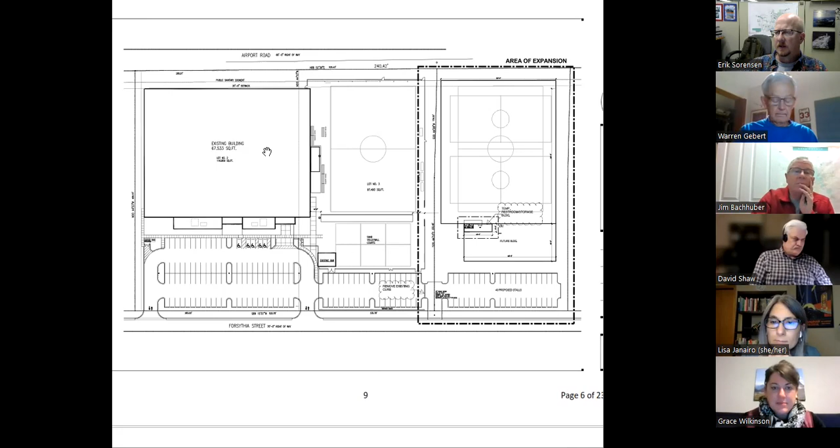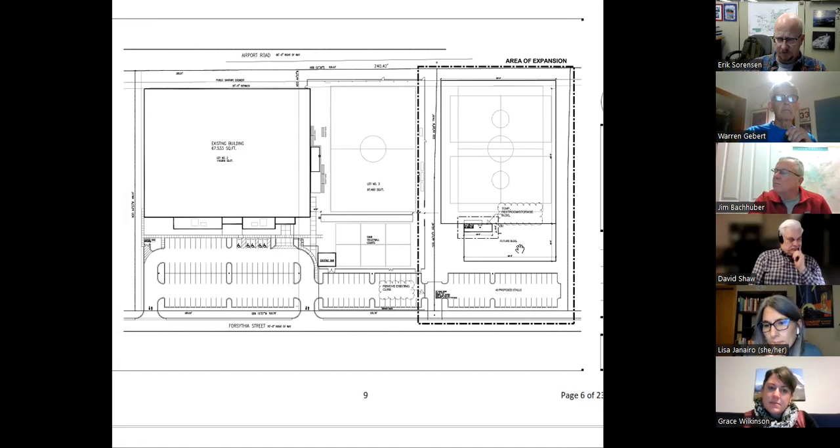So this is the existing KEVA site, Airport Road, just east of Pleasant View. Big building, one outside soccer field. And the proposal is for the lot next door. They're going to put in a couple more athletic fields, kind of a temporary bathroom building, which the plan is will be swallowed up by a larger building, and some additional parking.

He's got 2 biofilters planned at each end of the parking lot here. And they're going to fill this site up a little bit too, trying to match grade with the existing athletic field up here. So north is to the right on this screen. And they've asked for fees in lieu due to poor soil conditions.

There are 2 calculations that were included with the packet. One is for infiltration, the other is for recharge, and we treat those as whichever is worse of the 2. So the poorer performance is with the recharge, and he came up with $8,000 and some for that.

This plan is still in flux, but I thought it would be wise to bring it to you guys now, with potentially no meeting in December, just to try to keep it moving along. So I can answer questions. My recommendation was to go ahead and approve it.

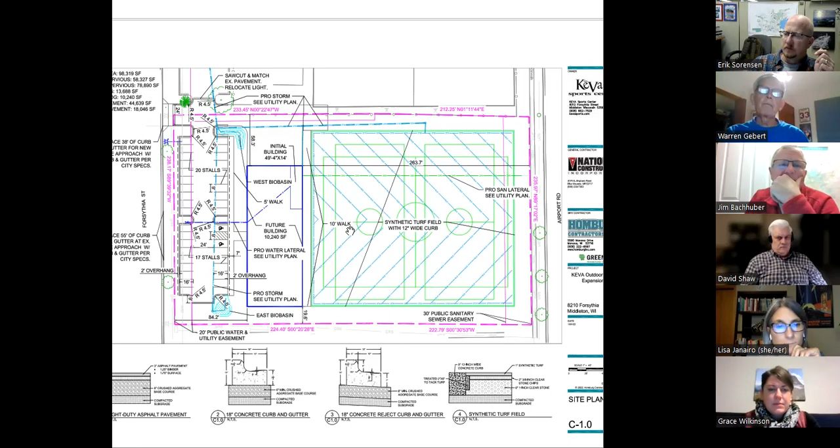They wouldn't meet the requirements for infiltration. They don't meet either of them. His infiltration calculation shows he's making about 71% of the requirement. And his recharge calculation shows he's only making about 34% of the requirement. And for those of you who are unfamiliar, in this sense the word infiltration really means stay on, which includes evapotranspiration, and recharge is what's actually percolating down into the ground.

So if we approve this, then they still would put those facilities in, right? They just couldn't meet our requirement. Yeah, and Confluence Pond provides the peak rate control for this area. So what they're tasked with is just infiltration and pollutant control, TSS control. So he's meeting that by passing the bulk of the water through 2 biofilters.

This is not a very intensely impervious development either. This is a synthetic turf field with tile under drains. So there is some discussion about how these facilities are treated, and we've been talking about that with the county. But it's not really impervious necessarily. So he does have future building included in his calcs, and this parking lot, and the athletic field. And he's meeting the TSS requirement, but not infiltration or recharge.

And the problem with the site is it's high groundwater mainly? Yeah. Which is not surprising in this area. Right.

Yeah, I sent out a couple emails today, and it probably isn't relevant to this case, but we have to start thinking about high water tables. And I think we need to have a specific ordinance that deals with evapotranspiration. This is obviously something for the future. I wouldn't use it, I don't think it necessarily has anything to do with deciding here, but...

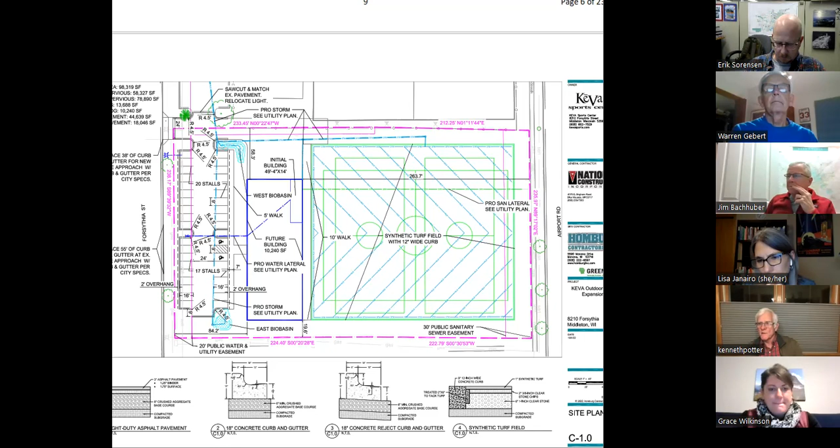It did ring a bell for me that high groundwater is increasing all over the county. We're not as aware of it because a lot of it is in parts of the county that don't have a whole lot of development, but if we could put that on the table for a future discussion, or whether we want to have a specific meeting on that, I think we need to come up with some kind of modification that deals with evapotranspiration.

I like that idea, Ken. I started looking at our ordinance and making some recommendations for volume control, which is evapotranspiration. And I got some rough wording down, and if I get some more along, I'll pass it on to you and let you look at it.

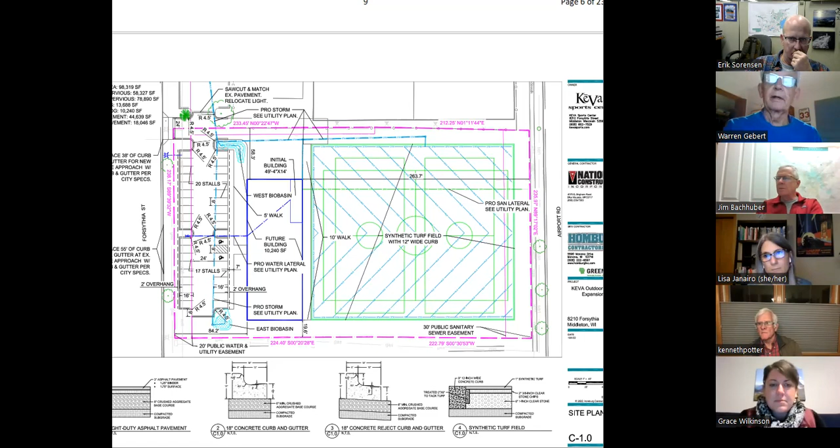Okay, that would be revising our present ordinance. You're talking about a separate ordinance? I don't know how we want to do it, but I think we have to worry about rising groundwater before we start having some big issues. Back when we put all this in years ago, we never even considered the possibility that groundwater could rise to the surface in some places. And now we know it can. So I think we're going to have to emphasize ET more.

Just for the ET volume here - this whole field is going to be turf, right? So it's too bad it's not grass. You're not going to get any ET off that surface. No, you get some evaporation. Yeah, a little bit.

Ken, are there any tools or models that have been developed for this? No, I don't think there are. That's something we're going to have to come up with, some way to quantify this. But I think we've got to do this sooner than later.

There's all around the state problems now with high groundwater. It's one of those things that's so different than flooding on Lake Mendota, which changes every year, but once groundwater gets high, it's really hard to do anything about it.

I have a question for Erik. So Erik, the $8,500, that's a one-time payment? Yep. And what do we do with that? How does that help us?

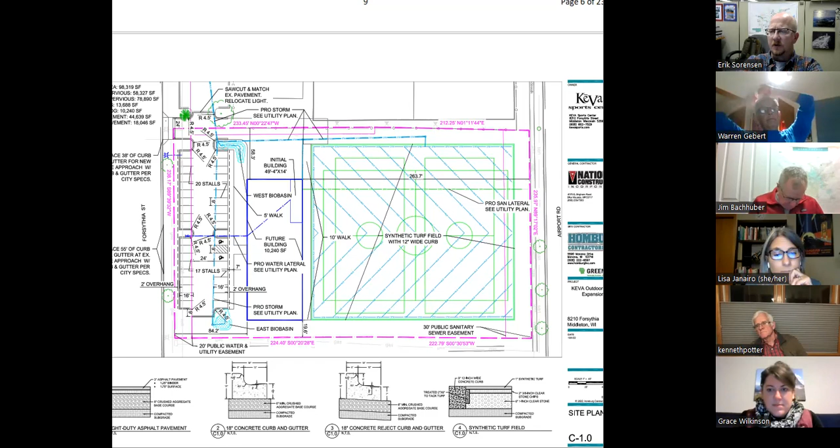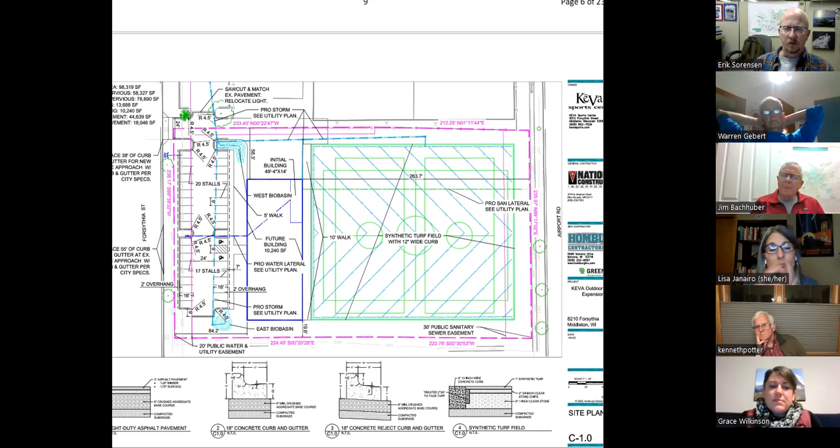Yeah, you're right. But I think Eric Thompson did a pretty complicated analysis for you guys a few years ago, trying to involve getting prices from developers of what did this facility cost, and how much. So the intent was that the fees in lieu would balance those costs, and I think it's relatively close to that - they're paying a fee in lieu roughly equivalent to the construction costs for the facility they would need if they could build it.

Just to follow up on Lisa's question - tell me if I'm right or wrong here, if anybody remembers - I think that money was used, some of it, back we're talking 15 years ago now, for some infiltration practices like at the high school tennis court. I think that might have been constructed with some of that fund. So the idea was to find infiltration somewhere else to offset this, but as Ken says, now we're fighting the high groundwater issue. It's just a good idea still.

Are they going to purchase this land to the east? Is that where the new field's going, or do they already own it? I think they already own it. It's an empty lot right now. There was a farmstead there, and the foundation elements of the old farmstead are still sitting there.

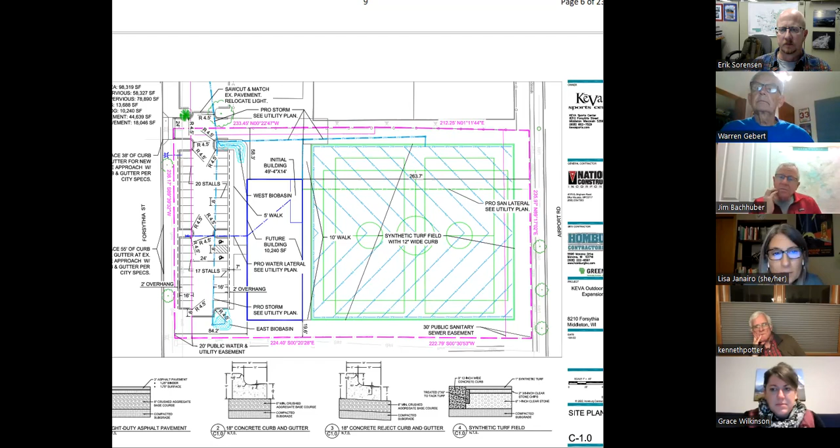Well, if there's no further discussion, we need a motion for approval. Well, I did have a couple of questions on page 13, Eric, if you could go to that page.

Number 5 on this page mentions the Village of Cottage Grove ordinances. I believe that should be City of Middleton. Good catch. Also, that website isn't a link, and I think I copied it correctly, but it doesn't turn anything up. I need to fix that.

There's a mention of inspections. Number 3: all erosion control measures and structures serving the site must be inspected at least weekly, or within 24 hours of the time 0.5 inches of rain is produced.

Who's responsible for that, and how can the city verify that it's happening? That is a standard requirement of a DNR construction site disturbance permit. The contractor is usually responsible for that.

This is something we also pay Dane County staff to do for the City of Middleton. Casey Coconati comes up at least once a week and does construction site inspections for us. She's really doing a quality assurance check.

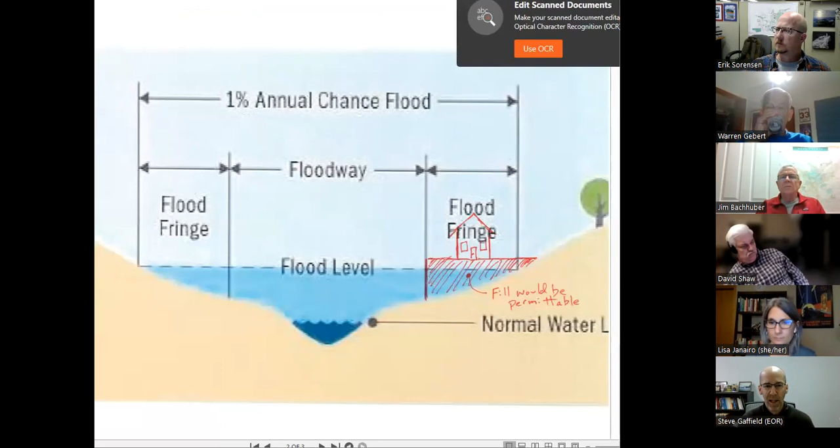Traditionally, most floodplain maps are delineated with what's called a steady flow model. There's a first step of engineering analysis to look at rainfall, say 100-year rainfall, for a watershed like Pheasant Branch Creek, to find the maximum rate water discharges into the creek at different places. That peak flow is put into a hydraulic model of the stream channel, bridges, and floodplain, and run down the stream as a steady flow, that maximum flow running all the time, to see where the water level pops up. That works just fine and is the state of the art, or state of practice, in many places.

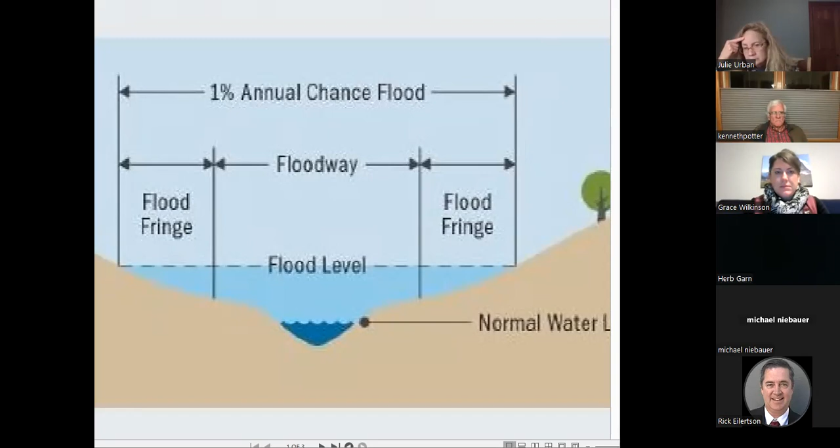But there are other places, and Pheasant Branch is a good example, where there are ponds and other areas where a lot of water gets stored. Much like an engineered detention basin, it slows the water down, detains some of it, and you have less flow downstream of that storage area or pond. To simulate that, you need what's called an unsteady flow model, which looks at change in flow over time, tracking how much runoff comes into these storage areas, how they fill up through a storm event, and what the release rate downstream is.

So floodplain maps can be drawn either way, and there are some policy implications depending on which choice the municipality makes to construct maps. There are some different requirements. Let me pause here and see if anybody has questions, or Eric, if you have any comments.

Quick question: when the ponds are being modeled in the unsteady flow approach, how is the lifespan of that storage considered, since it's filling with sediment over time?

Right, so the model represents the world and those ponds at one point in time. You can change that, you could say, what if this fills with sediment, we don't have as much storage volume. That can be changed in the computer model, but the model represents maybe a one day or two day storm event. It's not simulating what happens over, say, 20 years.

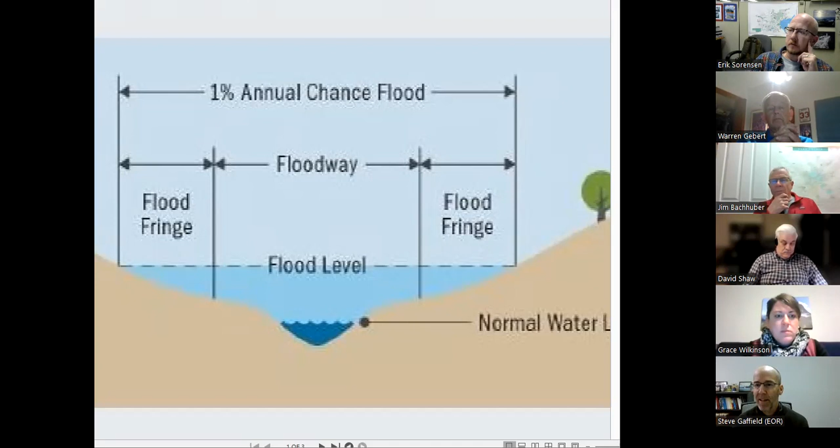That's right. Eric, this might be a good segue to go to the first slide because it's got a little bit of regulatory information on it. So yeah, Jim, to answer your question, it's a municipality's choice.

You could model steady or unsteady. You could model every storage area in the watershed or only the ones you think are important. DNR says however you want to do it is fine, as long as the computer models match the maps. There are trade-offs we'll talk about, but as long as you have a consistent approach, it's allowable to treat it differently.

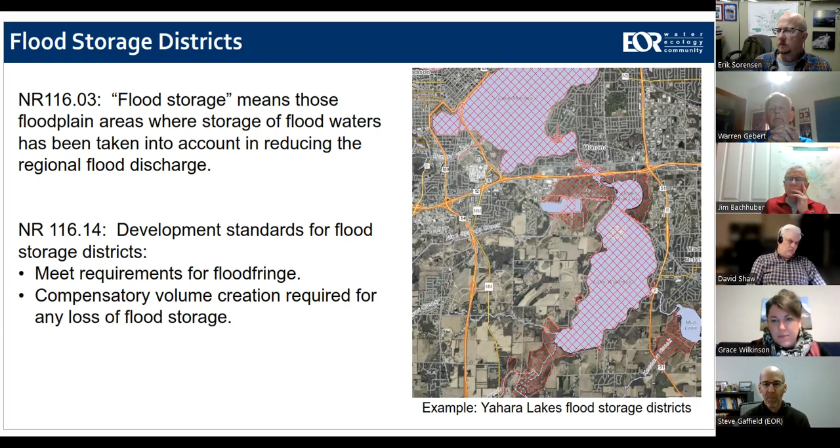So flood storage districts are defined in Wisconsin Administrative Code. They don't show up on FEMA flood insurance rate maps, but they are a zoning overlay that the state of Wisconsin requires in some situations. NR 116, the floodplain administrative code, defines flood storage areas as areas that store floodwaters where that's taken into account in reducing the downstream discharge. On the right is an image from the Yahara Lakes with an example of flood storage districts, which you can pull off DNR's web mapping application, showing some of the wetland areas around the lakes.

As you can probably figure, floodwaters that come into the lakes fill up the lakes and detain those floodwaters, and the Yahara River downstream of the lakes has a reduced discharge thanks to that storage that the lakes provide.

The floodplain maps are drawn representing that reduced flow in the Yahara River downstream of the lakes. In other words, if you ignore that storage, discharge out of the lakes would be much higher, flood elevations would be higher, and the floodplain would be mapped wider than it is.

And DNR says, sure, Dane County, you can map the Yahara River accounting for that storage of the lakes, but you've got to protect that storage so it doesn't go away. That's where the second item on the slide comes in, in terms of development standards. That's the trade-off: if a municipality is relying on that flood storage to provide a flood reduction benefit, it has to protect that flood storage and keep it from being gradually filled in by development or other activities, because then the maps would no longer be accurate.

So the same requirements that a flood fringe zoning district has apply here, buildings above a flood protection elevation, for example. But the additional requirement is compensating for any volume that's lost by fill.

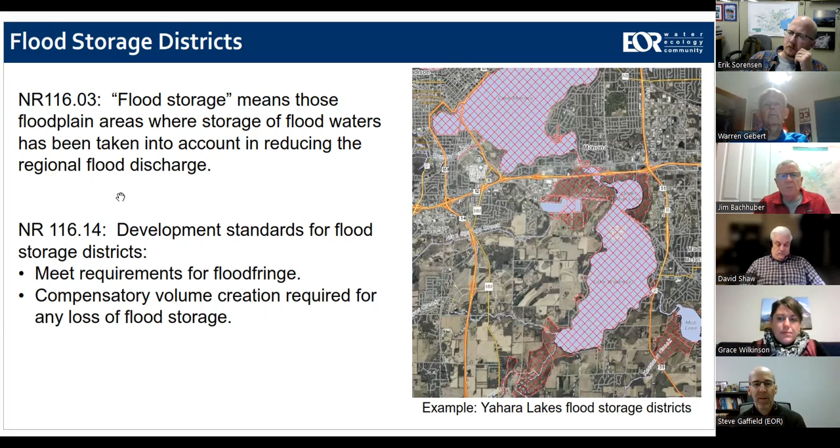Some of you folks weren't on the WRMC in 2020 when we did the floodplain mapping study for the city. Those maps are available, the study report is available, sure, Eric can provide it. I'm happy to. But for Pheasant Branch Creek, we built a new computer model, drew maps of the 100 and 500 year floodplain using that model and our judgment.

And some of that judgment was, where should you account for flood storage? Because the whole model for the watershed was one of these so-called unsteady models, so it looked at and helped identify any place in the watershed where there was storage. It didn't rely on us determining ahead of time, okay, there's going to be storage here, but not over there. The model simulated storage anywhere where it exists.

And then we used our judgment to identify areas that we thought were the most prominent storage areas and had discussions with the WRMC about that. And unsurprisingly, a couple of those areas are South Pond and Esser Pond on the South Fork.

One of the questions that Eric tasked us with here is, and this is a big picture question for all the storage areas, is what's the trade-off? What's the benefit to the city and residents of including the flood storage districts, because they do have these stricter requirements on development? Is the downstream benefit worth it or not?

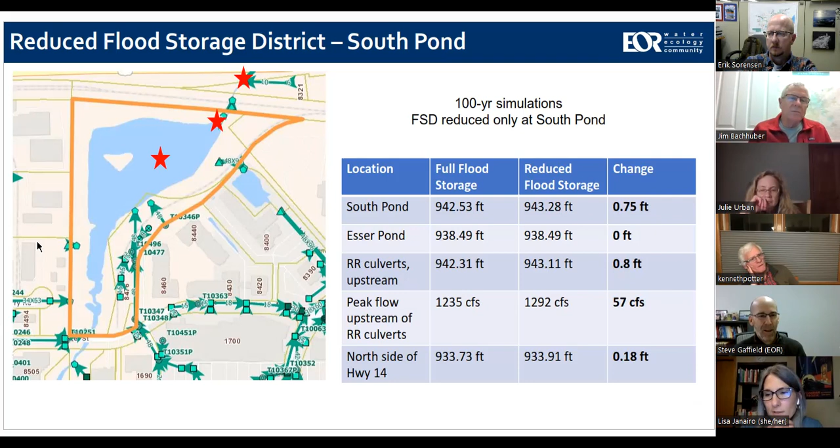It strikes me as like, we should go with what the physical reality is. But, you know, I'm willing to go with what staff recommends and what the commission agrees to, but I'm just trying to figure out, so those properties west of this polygon, what does it mean for flood insurance if we go with the reduced flood storage district? Eric, do you want to back up one slide? I think I can explain it from that slide.

It would be a flood fringe zoning district. So they'd be in the floodplain, they'd have to get flood insurance. They'd be subject to the city's zoning requirements for a flood fringe district. They would just not be subject to the flood storage district requirement. So they could develop, they could place fill to get a building above the flood protection elevation, higher than the 100-year flood elevation, and they could place that fill without having to create additional storage to make up for that someplace else.

Thank you for, in either case, Lisa, they could redevelop and they would have to lift a new building up above the flood protection elevation. And the difference between the two is that if this were a flood storage district, they would have to provide this compensatory storage. And since we're talking about such huge volumes here...

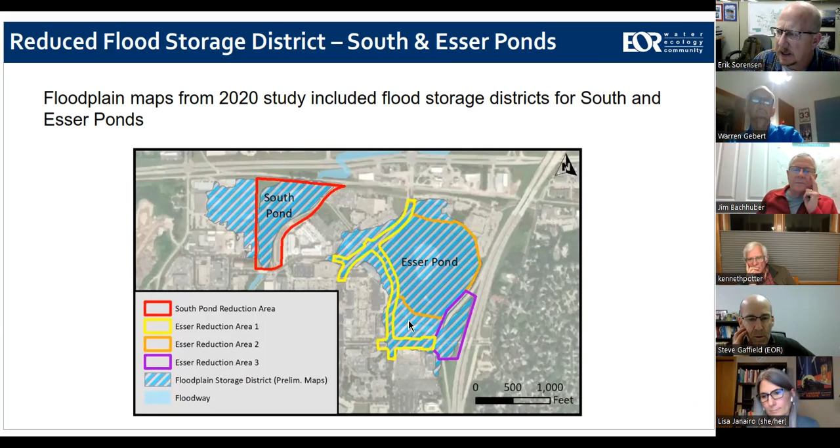So when we're done here, I want him to go ahead and do another scenario here to make clear what we're talking about and what the impact might be. Okay. Sorry. Go ahead.

As you might guess, out of the storage that's left in the areas that we modeled, that purple polygon around Esser Pond itself has most of it. The rights of way don't have nearly as much—they're smaller areas, they're higher elevation, so the water depth is lower.

And if you were to remove the rights of way and have the flood storage district just be the circular area around the pond, it would increase flood elevations again, but it would be on the same scale as this increase we're looking at here, the 0.2 of a foot, because you'd actually be removing less storage than we'd already removed by taking out private parcels, if that makes sense. In other words, something like 80% of the storage of these areas that Erik drew is in that central one around the pond.

So if we enacted maps that kept these flood storage districts as they were originally mapped, and it includes areas of the DOT right of way, do we have authority over the DOT right of way—that they could not make changes there without providing compensatory storage? Does anybody know the answer?

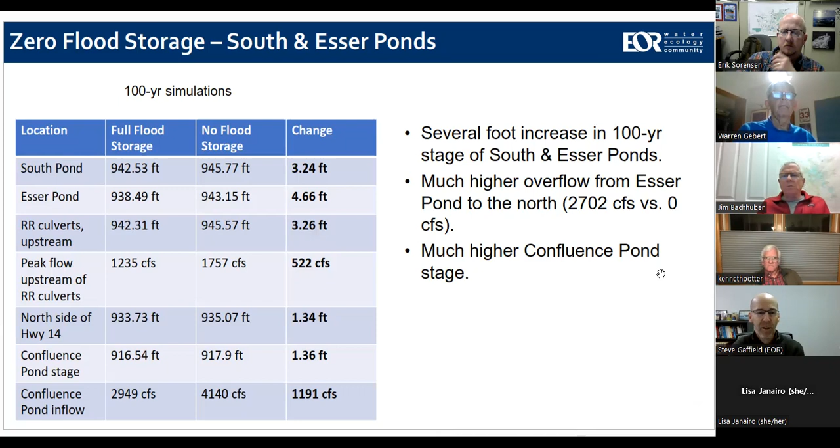Okay, Erik, why don't we keep going?

So here we looked at 100-year elevations in Confluence Pond and then Pheasant Branch downstream. Some of the bridge crossings you see here. We also looked all the way down to Century Avenue. And just to cut to the chase, ignoring the storage would raise the elevation on the map for Confluence Pond by about 0.6 of a foot. And same thing when you get down into the Pheasant Branch Creek channel downstream.

You look at Deming Way, Parmenter, you're still at about a 0.5 foot change in the mapped elevation. And even all the way down the valley to Century Avenue, there'd be about a 0.5 foot impact. And again, that's because of increased discharge coming out of Confluence Pond without that storage, and that has effect all the way down the stream. So I think that's what we looked at there.

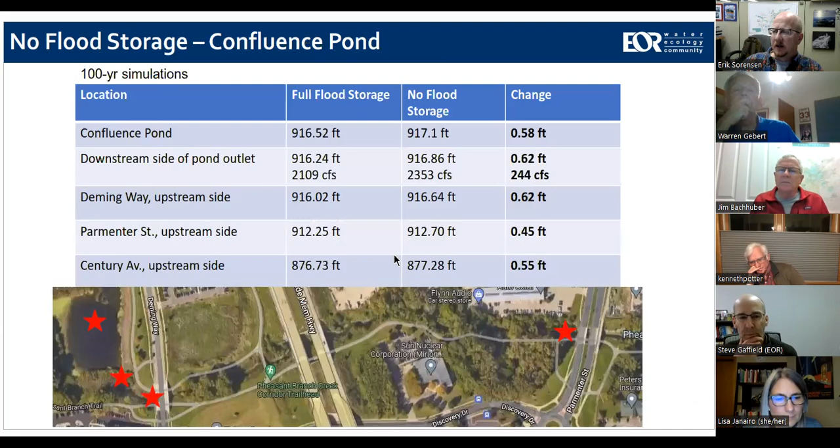So for the South Pond area, the recommendation was to leave that storage district in place. For Esser Pond, I'm not so sure. I want to ask Steve to do a little more modeling to flesh this out. But given that there's no change in the elevation increase downstream, it may be a possibility for you guys to consider that we limit the flood storage district in this case only to this conservancy land essentially around Esser Pond.

And this is nothing you have to decide tonight, but that's kind of the direction I'm headed in, pending a little bit more modeling out of Steve and his team.

And Erik, I should point out, one thing we didn't do in the limited scenarios we ran is we didn't run a what-if you reduced storage district at Esser Pond, but not South Pond. So it's possible that scenario you still would have some downstream impact on the South Fork, and that the changes in South Pond have overwhelmed whatever the effect of Esser would be.

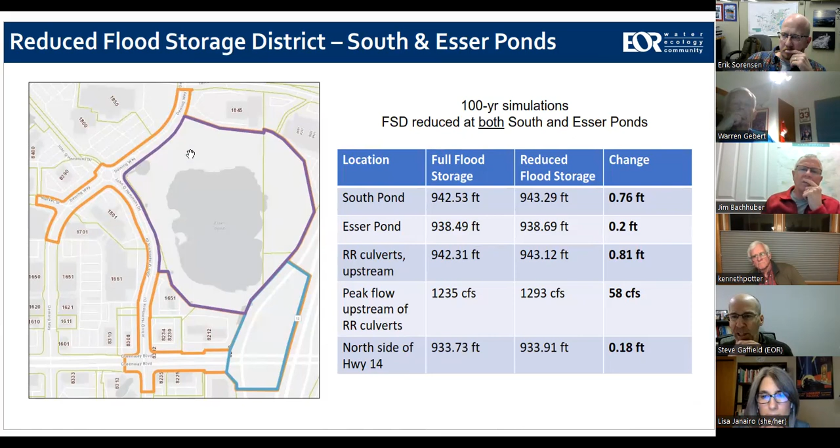So yeah, I guess you would want to see those results before making a decision on that. And then for Confluence Pond, I recommended we leave this storage district in place.

For this area of Park Street, I don't know if it matters too much. One way of looking at this, if we take away the flood storage district, we get a little bit of rise downstream and we get increased flows, but this is all city-owned land, and that could be viewed as a conservative move, with just a little bit more floodplain protection, essentially.

I think any work that the city would do in the creek corridor, we're still going to be stuck with these same requirements—we have to prove we're not raising the floodplain, or get an easement from anybody that we raised it upon. So this is not so consequential either way, I don't think.

But it's true, you could picture a scenario where the city was rebuilding some of the bridges in the conservancy, raising approaches, placing fill, and then needing to scrape someplace along that reach to compensate for that storage if it were a flood storage district.

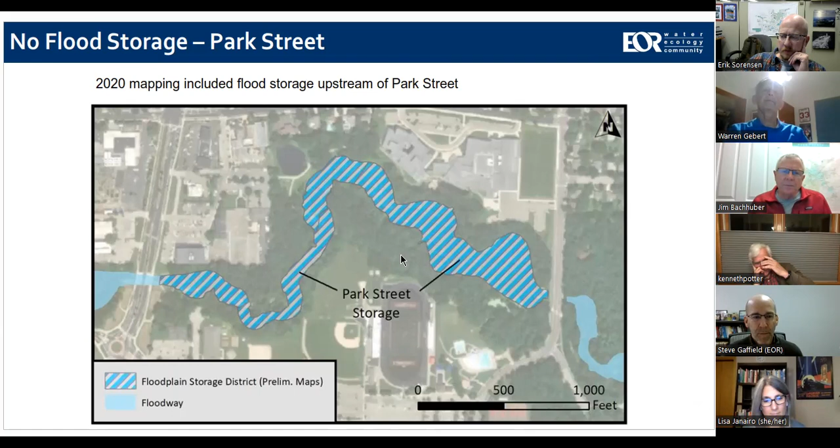So, to quantify what Erik just described: upstream of the culverts, getting rid of the storage district would raise flood elevation by 1.5 feet. It's still pushing a foot up north of the track and the football field. That tapers off as you go upstream, again on city property. Downstream, there's the increased discharge—the 200 and some CFS increase, about a 10% increase in peak flows, and about a 0.5 foot rise downstream to Century Avenue.

I know it seems like the most likely place where a private parcel could be affected is right at Century, thinking on the east side. There's a business there, I can't remember what it is. But obviously you would want to look at that and see if there's any private property or other owners that are affected. For the most part, that change would be on city Middleton property.

The new development at the corner of Branch and Century—we did ask them to dedicate basically the stream banks to us, and this is kind of one of the reasons why, just to control those stream banks and ensure that we're keeping this all in place.

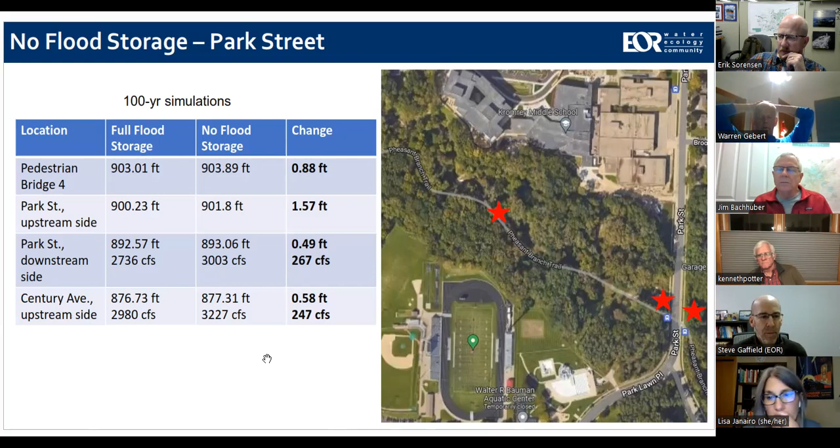The last storage area to look at before you get your fill of storage areas is the airport. The North Fork comes in under the runways on the west side, right where Erik's pointing, and backs up, creating some flood storage there in the low area. Then there's a tributary that comes in from the north, from one of the valleys on the east end of the runway, the airport property, and then it crosses underneath Airport Road in a big box culvert and then goes down Nursery Drive.

Those are both in the model. You might recall in the big 2018 flood, those areas were combined and flow went around the north end of the airport and down the east end of the runways, over Airport Road and down Nursery Drive, kind of through the whole Kiva area. So even in the 500-year event, those flood storage areas are combined into a single one. But the 100-year, our calculations anyway are showing that they're separate.

We looked at those as one unit. We didn't separate out taking one and not the other, but we did look at what happens if those storage areas are removed. On the North Fork, over on the west end of the airport, it's a more modest effect—about a half a foot change upstream. That suggests those culverts under the runways have quite a bit of capacity, so the water doesn't back up as much, even if you assume it's a uniform flow going on forever.

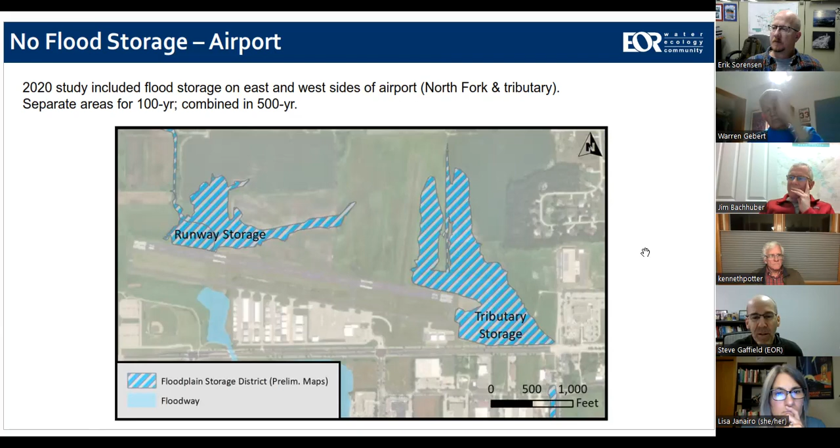But it's a good point—as the water table goes up, it gets harder to do that. It's explicitly in the code: excavating below the water table doesn't count because it's already full of water. Although it doesn't define how you set the water table elevation.

Flood storage—okay, we talked about that. I think that's it for flood storage. We've got the conclusions; I don't think we need to read through them again, but here's the recap. Erik, I guess you've given your recommendation. Happy to answer questions if you've got them. But this is the end of part one.

Are there other flood storage areas south of the area you showed at South Pond and Esser that we didn't see tonight? No, okay.

And yeah, this is only - just keep in mind, we're only talking about the Pheasant Branch watershed here. There's other parts of the city that we've not done this kind of mapping or flood analysis on. So this would only apply to this one watershed.

Well, it's most of the city, really. Not really - not Graber Pond, not Bishop's Bay, not anything east of Allen Boulevard basically, right? Not the watershed that goes directly to Mendota, and not Black Earth Creek.

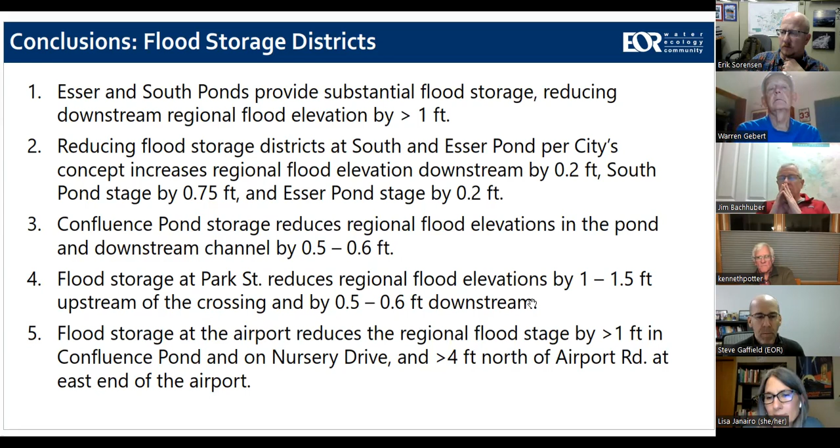All right, this hopefully will be more straightforward because now we're putting the maps aside - never mind the maps. Are there opportunities to make some physical improvements to alleviate flooding? Eventually that would be reflected in the maps presumably, but this is a more straightforward look at real world conditions, our best estimate of what happens in flooding.

And there are several ideas that Erik asked us to evaluate to make some improvements. These are evaluated using the unsteady model, the original model, which again is our best representation of actual conditions in the watershed. The first scenario Eric asked us to look at is: what if you expanded South Pond and made this area even bigger? Erik, is there any preamble you want to give as background?

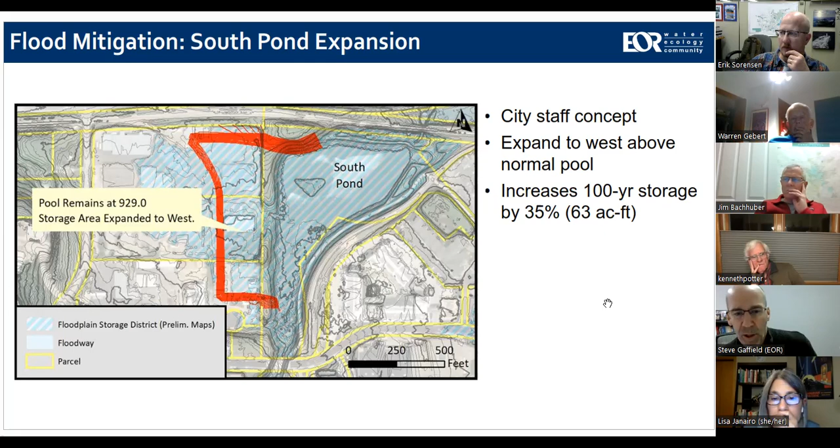Erik, next please. Okay, so this is similar to what we showed before, but this is looking at potential improvements in flooding with this project.

The biggest benefit is local, around South Pond and that co-op property: a 0.34 foot reduction in the peak 100-year stage. There's also some lowering in Esser Pond, about 1/10 of a foot, and it reduces the discharge a bit, not as much as I might have thought. On the north side of Highway 14, it's about 1/10 of a foot, and a little more than that as a benefit of lower flood elevation at Confluence Pond. So there is downstream benefit, but the biggest benefit is local. The actual flood elevation on those parcels would be lower too.

It's really not much of a gain. But you think about the cost of that, you can look at the benefit. It was a little disappointing to me, to be honest, where the scenario where Steve removed 25% of the storage led to 75 hundredths of a foot of rise. And here we're expanding the storage by a greater amount, roughly 35%, right Steve? Right. And yet the benefit is half as much.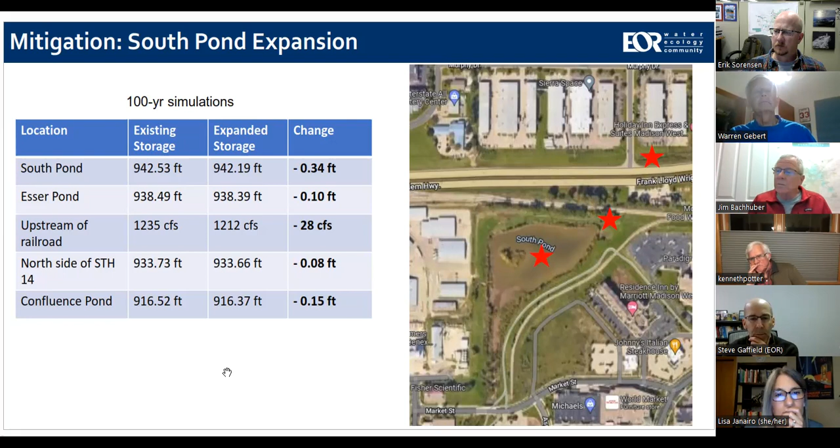This time around, Eric asked, what if you drop the whole thing? So keep the shape, drop everything 18 inches. You'd lower the starting elevation of the pond, and you'd gain a little bit of storage that would then be dry and available for flood storage. To accommodate lowering the weir, you'd have to do some dredging of the channel downstream, otherwise you'd just be burying it into the stream bed. So that would be part of the project.

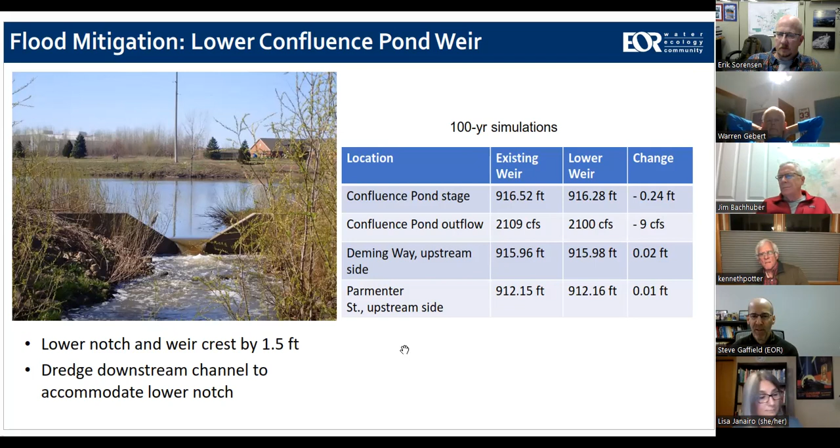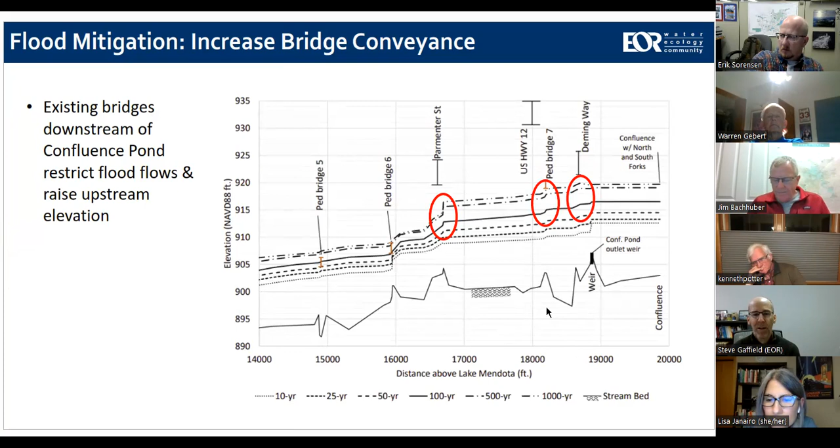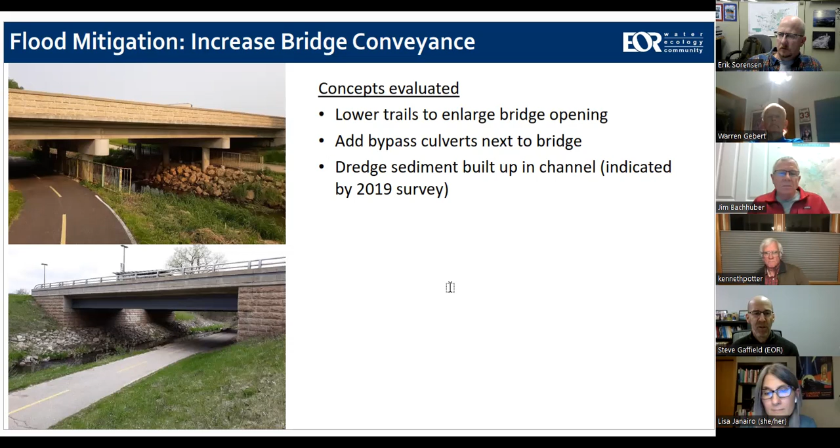It's an expensive project. And then the survey data indicated there's another potential opportunity here. The survey for the study was done in 2019, and it found pretty significant buildups of sediment underneath those bridges - thanks for pointing that out, Eric. That's why the stream bed pops up in that strange looking way. Again, the vertical exaggeration makes it look silly, but that's actual survey data - surveyors collected it in the stream since there's sediment built up. We don't know if it's still there, but it was in 2019. So one concept we looked at is, what if you just cleaned that sediment out, but didn't modify the structure? Presenting results in a different way, there's a lot of scenarios here.

But there's a big picture. This, for starters, shows what these various improvements at bridges plus modifying the confluence pond weir would do to the confluence pond stage. All these bars represent the stage of the pond for the 100-year event. The existing scenario is shown on the left, and then these various things we looked at.

Here's lowering the weir as the first bar. There's that 0.24 foot reduction we already mentioned. Then there are several things that all have more or less the same effect, about 0.3 or 0.4 feet: lowering the bike paths, adding a bypass culvert, and dredging out the sediment seem to have very similar effects.

Obviously there are different size culverts you could put in, different amounts you could lower the trail. It was our judgment to say how much, but it's kind of a horse apiece—you get similar benefit from doing any of those things at any one of those 3 downstream bridges.

The last bar looks at what if you made some kind of improvement at all 3 of those bridges plus the weir. There you go from a 0.4 foot reduction in the pond stage to 0.7. So it's bigger, but they don't all add up—you don't get 0.3 or 0.4 for every one of those and sum them to more than a foot, but you do get 0.7.

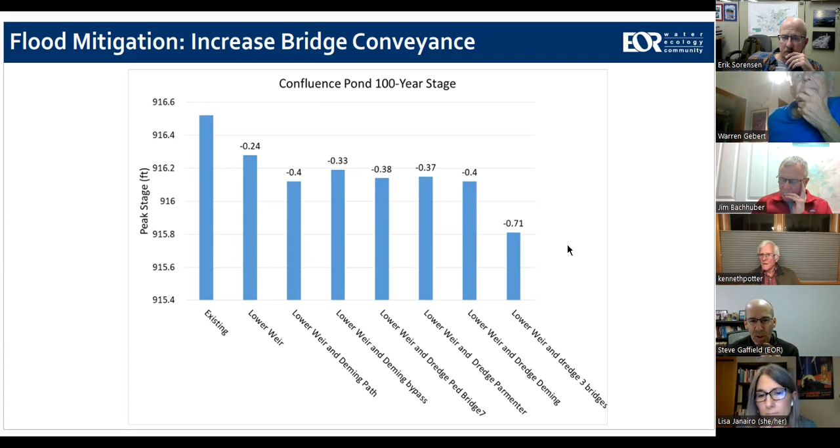There's one more slide with results that aren't earth shaking for the reach downstream—it's worth a quick look. And then there's one more point to make about more frequent events, Eric, don't let me forget that. But go to the last graph. Back up one. There you go.

This is just looking at elevation in Pheasant Branch Creek on the upstream side of Deming Way, again for the 100-year, all the same scenarios. You'll note that lowering the weir alone makes essentially no difference. Any of the individual improvements, the way we modeled them, give around 1/10 of a foot lowering. And if you did improvements at all 3 bridges plus lowering the weir, it's 1/2 foot of relief at Deming Way.

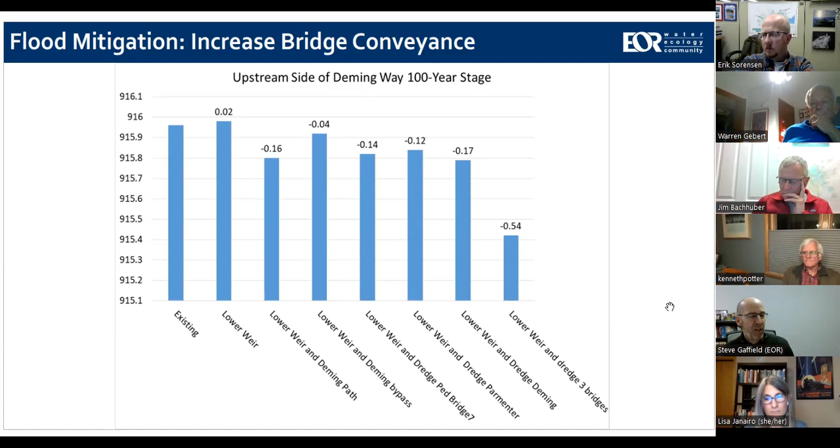So less of a lowering benefit than in the pond, but that's what it is. The point I wanted to mention, and Eric's talked about this with us, is we're focused on the big events. Things you would do to pass more water through these bridges, for instance, would have an effect on a small event like the 5-year or the 2-year event.

I don't have the numbers at my fingertips, and I know Nick Hayden here modeled that and looked at that, and there is an increase downstream in the discharge of the smaller events. And that could be problematic because it tends to lead to more scour, and there's all the restoration work going on in the conservancy downstream.

And so you would certainly want to evaluate those issues. As Eric, you've pointed out, try to design these projects if possible to hold back the big floods, to pass more water in the big floods, but to not increase discharge of the smaller events that have a big impact on sediment transport and bank stability. So just another complication that you would want to evaluate before moving ahead.

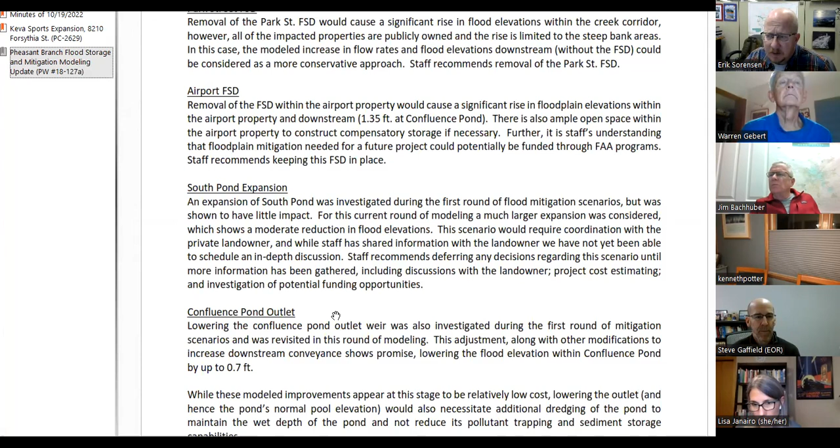I think that's it, Eric. I don't know if you've got recommendations that you want to follow up with here. Yeah, so the only thing left unsaid from my standpoint is that I think the Confluence Pond outlet modification still has legs in my eyes.

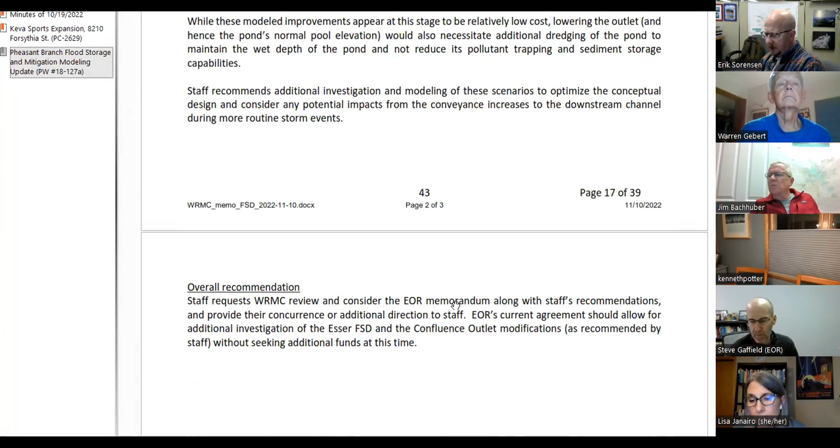So there's two things. Steve still has a little bit of money left in his contract, and we kind of set it up that way on purpose, so there could be a little bit of follow-up without asking for an amendment. So I'd like to get a little more analysis—Steve, correct me if I'm promising things you can't keep—a little more analysis around the Esser scenarios and a little more around these confluence outlet scenarios, try to maximize or optimize that.

And then allow staff to look into that South Pond scenario a little bit further, and then come back to you probably in January, or maybe it gets pushed to February. And at that point, ask for, I guess, final direction on the philosophy we want to use to take this mapping forward.

Sorry. And then at that point, I guess we would ask Steve for an amendment to actually draw some maps. And then we'd take it to everybody else—legal, council, public lands, et cetera—and try to keep this moving forward.

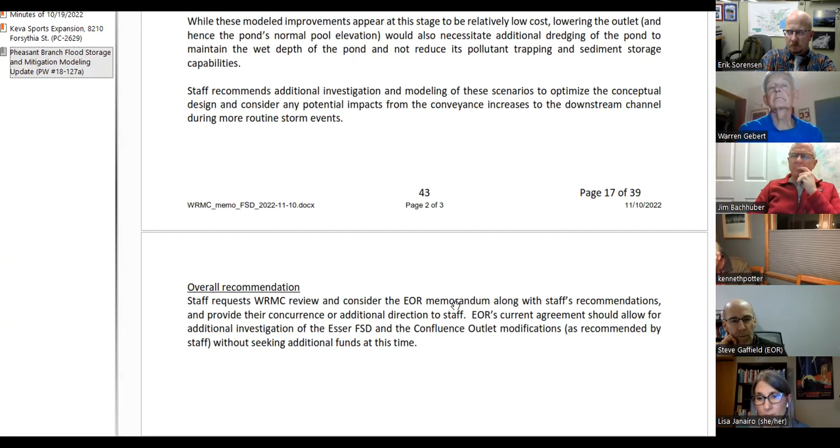That sounds like a good plan to me. So Erik, the only one of the recommendations in your memo that we maybe don't agree with is the one for the Park Street flood storage district. That was the one that Jim brought up, the issue of perception of the city not holding itself to the same standard as others.

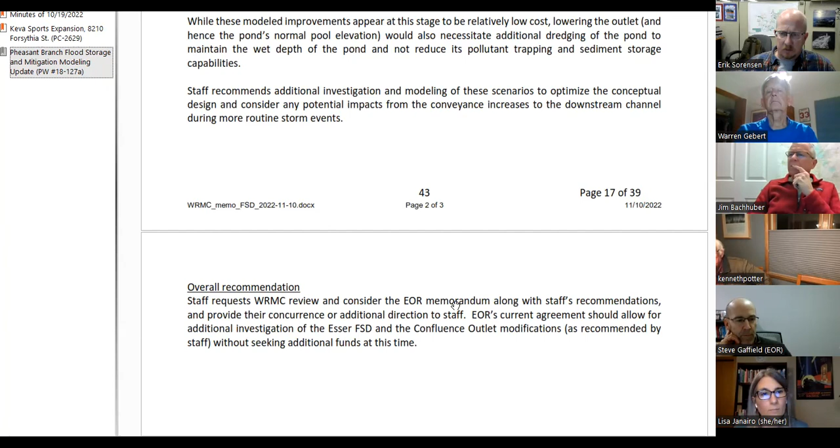Yes, that's what I heard, Lisa. Would you want the commission members to make a motion on that, Erik, or not? Well, yes, I would.

I'm happy to move that the commission accept the staff recommendations in the memo dated November 10th, 2022, with the exception of the removal of the Park Street flood storage district.

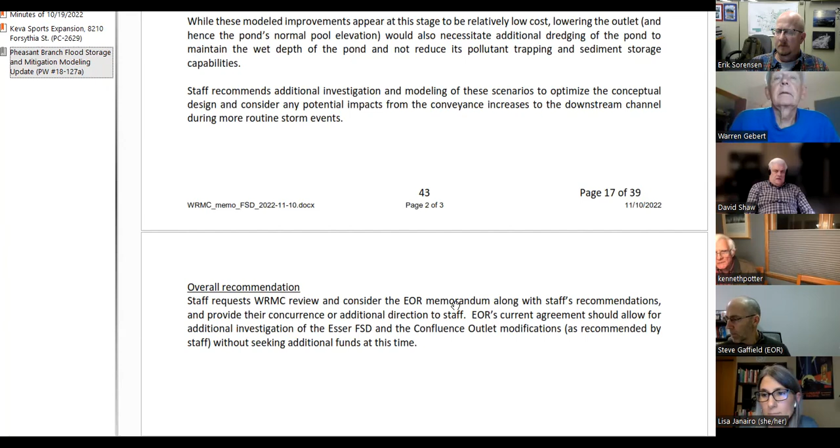Is there anything else we should discuss on this, Erik or Steve? Nothing on my end. You've heard enough from me. Good, thank you, good job, Steve, in presenting a complex thing so we could understand it. Oh, thanks, yeah, thank you. Well, thanks for reading this, thinking it through.